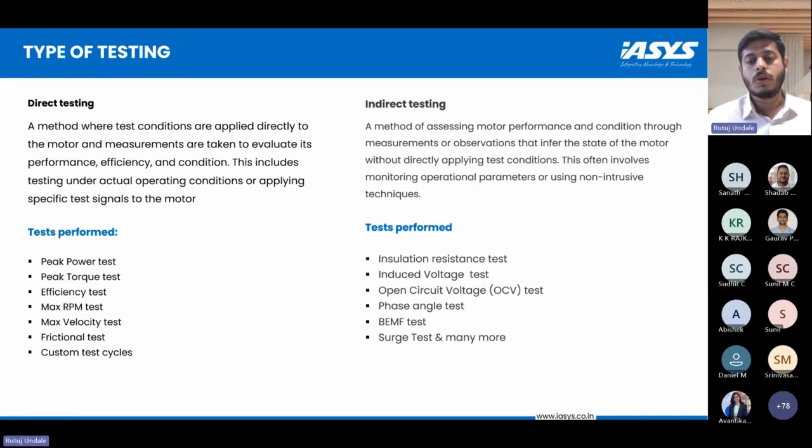Next one is the back EMF test, where the no load EMF or induced EMF is generated in no load conditions, to check whether the assembly of the motor is properly done or not. This is the basic architecture of the motor testing setup. So, depending upon the structure, this is the indirect or direct. There are many devices which are used because the devices play a vital role in this testing.

So these devices are connected in different ways, where they are connected in all three phases. A separate connector is connected to the motor. So depending upon the device structure, these are connected to the motor. This motor is connected to a servo or a dynamometer depending upon how much RPM and how much torque you want to give.

To run the entire system, we have an automation panel which includes a number of PLCs, servo drives, switch gears, and as it is a production line, the main factor here is the time and the safety of the operator. So the complete cycle time we have to manage with all the safeties. Considering the safeties, we can use light curtains, so that no physical object can enter the testing area during testing, and we can stop the test immediately.

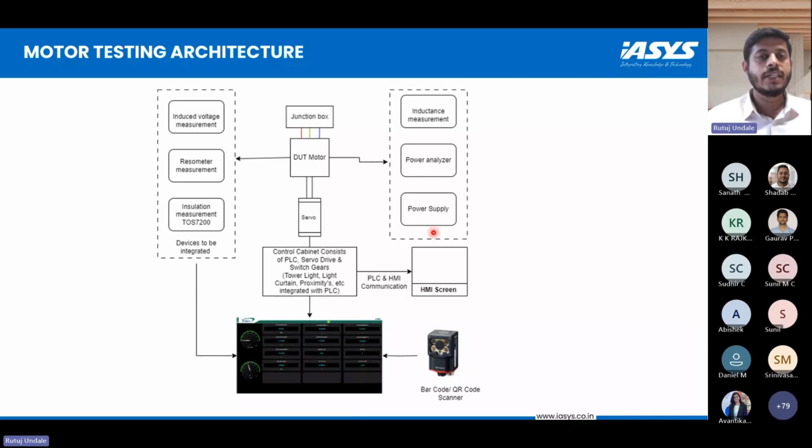This is directly connected to our server, where all the data results of the motor are saved under that serial number. So this is the complete architecture, where you can run a number of tests and check whether the motor is okay or not.

So next was the benefits of indirect testing. As I mentioned, once you completely assemble the motor, you have to check the various parameters, and once you get a failure there, a lot of time is invested in that. So to reduce the time and increase the productivity, we can use these indirect types of testing in the earlier stage of assembly of the motor.

So in this, the major parameter is the resistance of the motor, to check whether the motor can resist high voltage shocks and short circuits: insulation resistance. This testing is necessary, as almost 80% of electrical maintenance and testing involves the integrity of electrical systems.

So the voltage induced in this testing directly influences the torque generation and mechanical power output. So this is a very major parameter, because rather than doing the performance test at a later stage, it's better to do the same testing at the earlier stage. That is the voltage test, where we can clearly know the motor can generate that particular amount of torque or mechanical power.

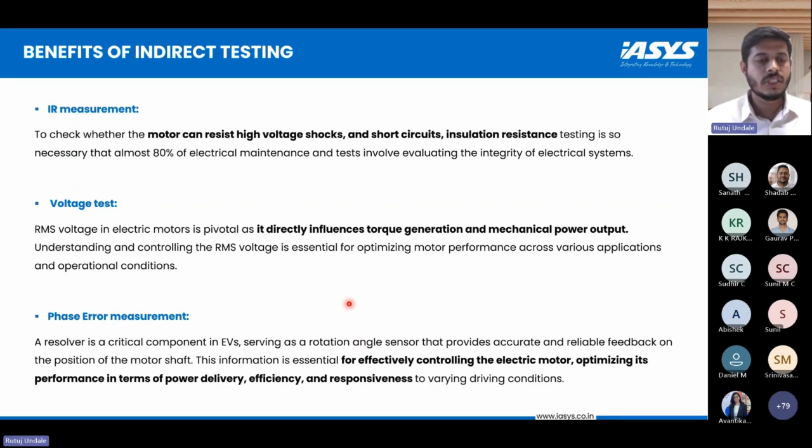So these are all the devices. Some of the devices I can say which are used, such as power analyzer, where you can have a number of parameters such as phase voltage, phase currents, power supply, and frequency as well. So in performance testing, you need to power up the controller. So to power up the controller, we need the DC power supply constantly giving the power to the controller.

And to check all the electrical parameters, we need the sensors which are integrated with the power analyzer, that are current sensors. So to check the other parameters such as the resistance, we have an insulation measurement. In this type of test, the motor is induced, or a high amount of voltage is passed through this device within a fraction of seconds. And once that voltage is passed, we get a resistance value, and from that same device, we can get to know whether the motor is okay or not. So from the similar device, we can check the motor is okay or not instead of going to the automation system.

To check the angle or to check the phase measurement, we have a resolver measurement where you can check the angle between the stator and rotor, as well as the RPM of the motor, because nowadays the motors are assembled with inbuilt reduction ratios. So the shaft RPM is completely different to the rotor RPM. So if you want to know the original rotor RPM, that can also be recorded in this particular device.

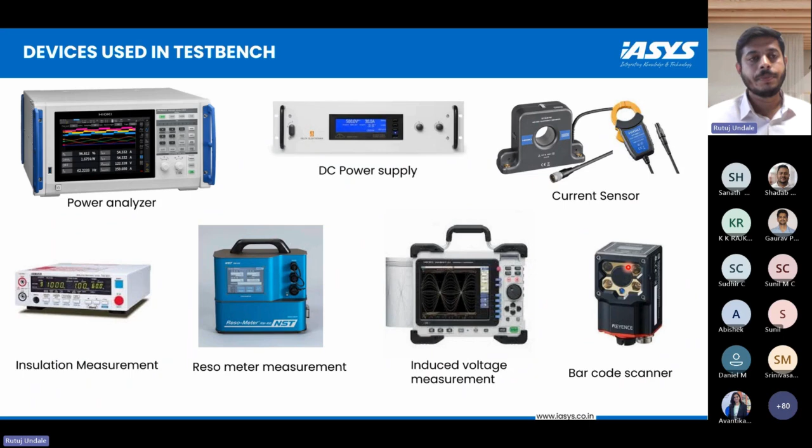So once all these tests are passed, you get a final result of pass. If any one of the tests is failed, the final judgment will be failed. So this can be customized as per the customer's requirement or any standard format if any customer has.

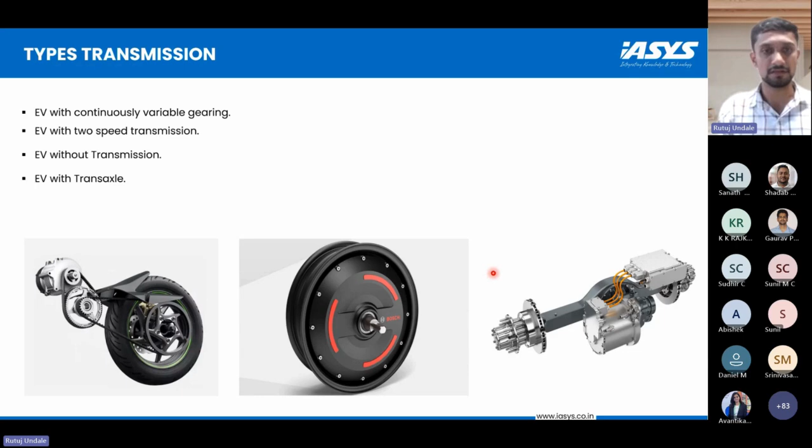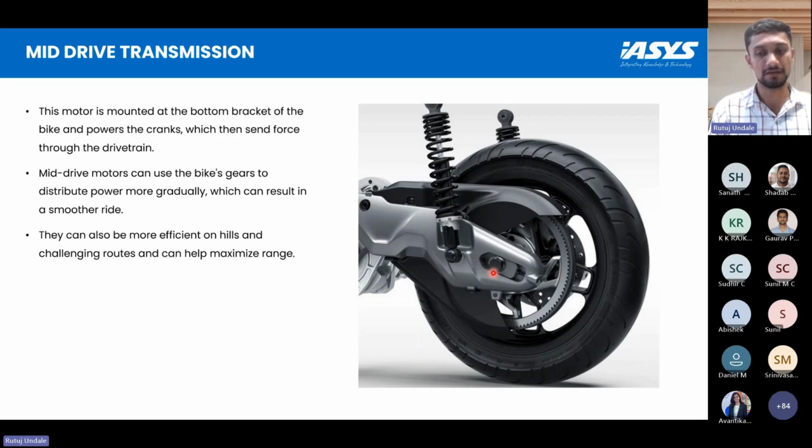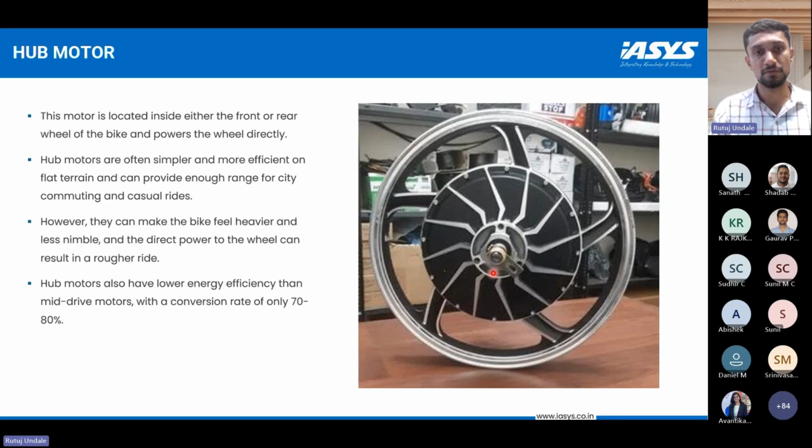So first we'll understand the difference between the mid-drive, hub and transaxle case. In mid-drive, the motor is mounted onto the frame of the vehicle, where the power is delivered to the wheel via gears using belt transmission. In a hub motor, the motor is directly placed on the wheel, where the power is directly transmitted to the wheel. Hub motors are more efficient on flat terrains and for daily commuting. Hub motors also have low energy efficiency compared to mid drives, with an energy conversion ratio of 70 to 80%. Transaxles are mainly used in commercial vehicles.

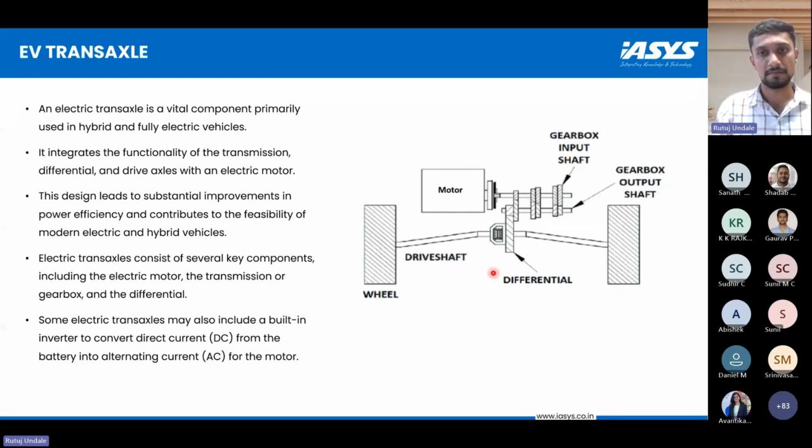They consist of various different components in the transmission. The first one is the motor, second is the differential, then we have the gearbox. Transaxles are mainly used to deliver the power to the wheels in a more feasible way. These are some of the major key differences between all three transmission drives.

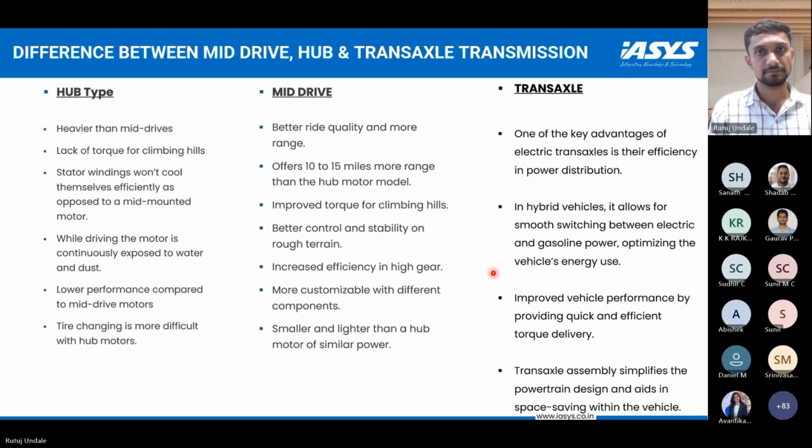So now first we will understand the simulation model, where the main aim of this model is to predict the energy efficiency and the power consumption of a drivetrain. First we have the driving cycle imported to our model, which is the NEDC cycle. The main purpose of this NEDC cycle is to verify the power consumption of the EV or any commercial vehicle. Then we also imported the motor efficiency map of a particular motor type using the manufacturer data. Also, we have used MATLAB and the QSS tool to provide the data and predict the outcomes of the model.

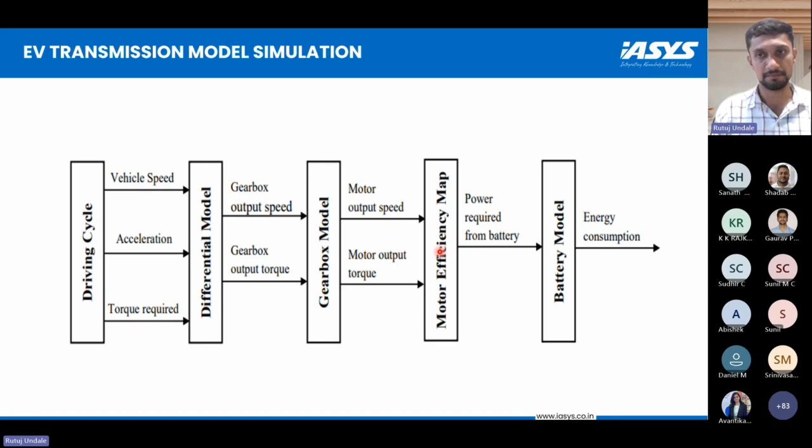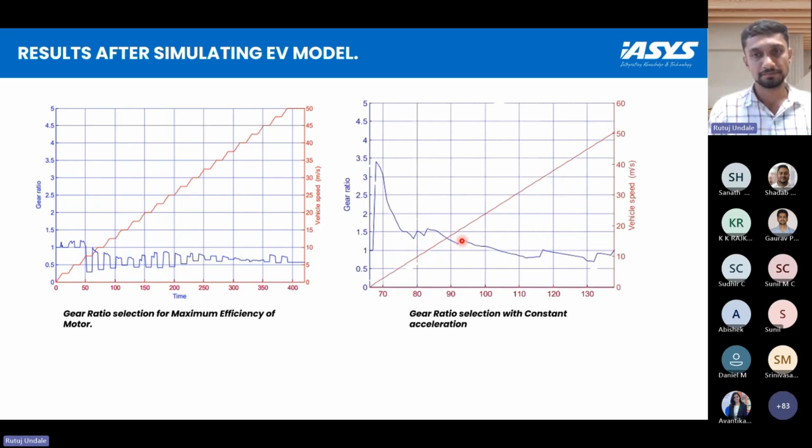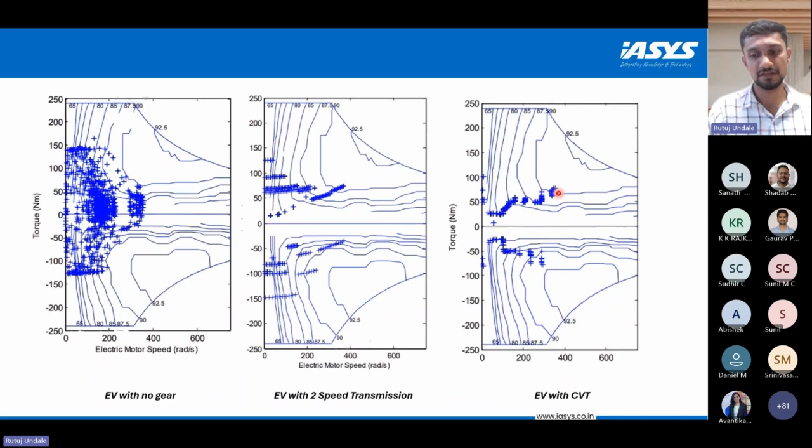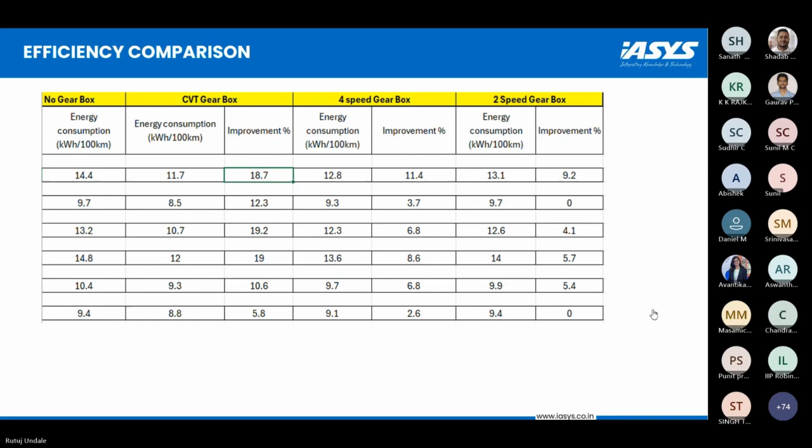Now we will see the system architecture for the transmission test rig, and how IASYS will handle the transmission test rig. Here is our main software, Orbit, and there is an embedded controller which we have communicated with, and there are DAQ modules through which we can take the signals for torque, temperature and pressure.

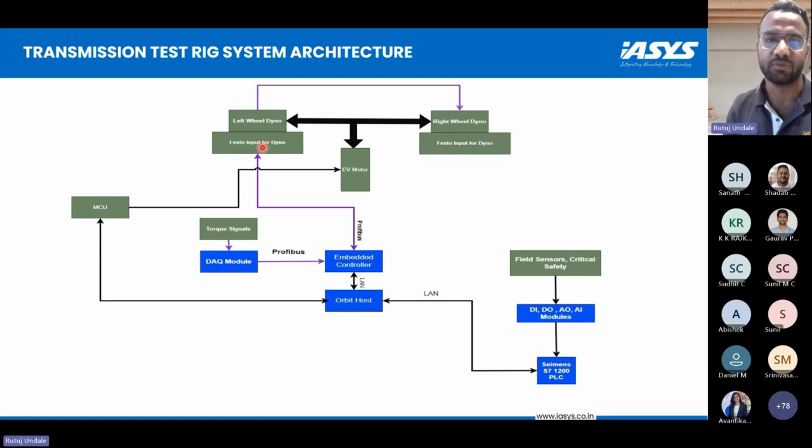And from CAN, we can communicate with the EV motor via MCU, and we can give a demand to the EV motor also. In the meantime, we will send the demand to dynos for the transaxle case. There is a left wheel and right wheel, both dynos are there. So we can send a torque demand or speed demand to the left wheel and right wheel dynos also. And also, we can communicate with safety PLCs because there are so many safeties which we need to consider while doing the testing.

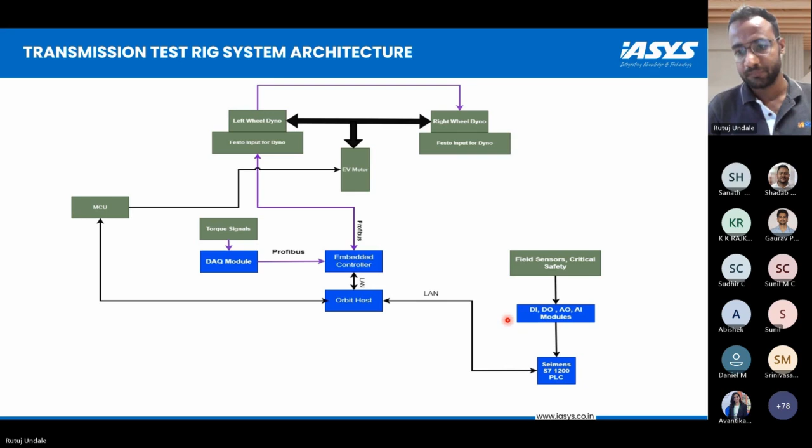These are the following tests which we conducted on the test bench, like acceleration test, efficiency, motor thermal, RLS test, and NVH. In the acceleration test, we will check the vehicle RPM from zero to its max full capacity with 100% throttle in 1 second, and how the vehicle will act on the RLS test, we will check that.

For the motor thermal test, we'll check the thermal efficiency and how the motor temperature will work. And for the RLS, there is a road load test in which we'll evaluate the vehicle parameters on actual road conditions, and on that we will check the current and battery voltages.

And the next test is NVH. NVH basically refers to noise and vibration, and this we will check on a motor test bench in no load and loaded conditions also, which evaluates the gears present in the EV.

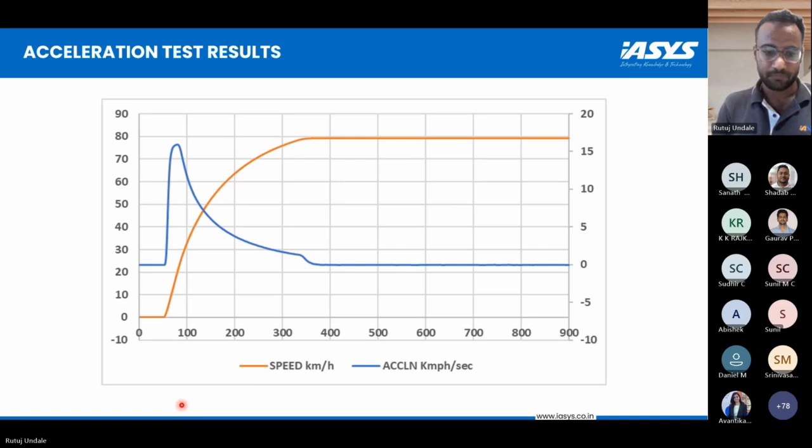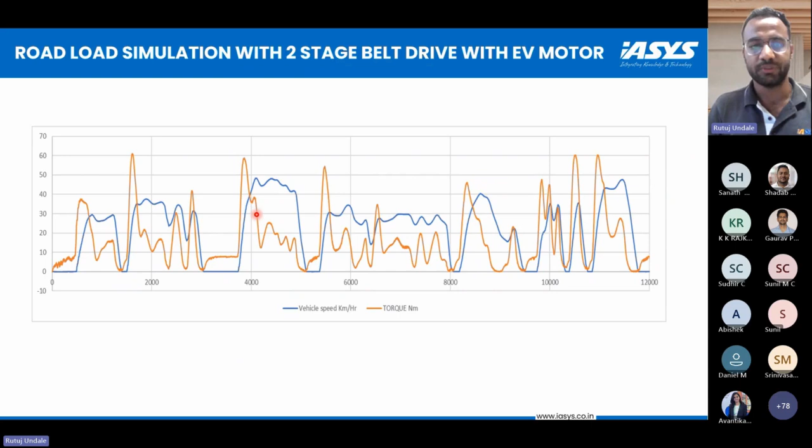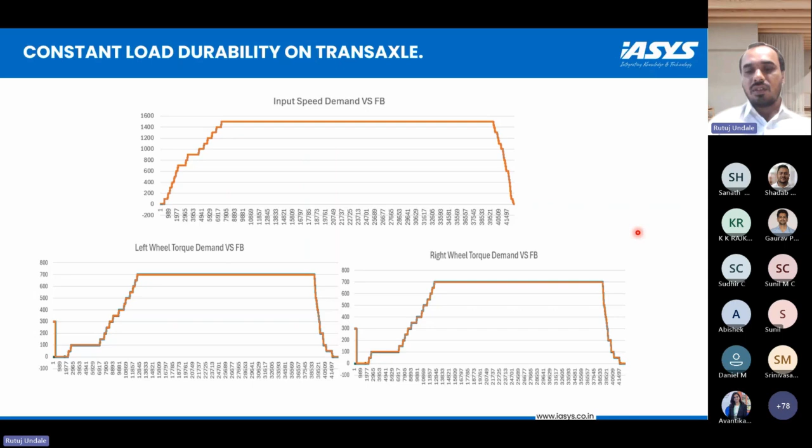Thank you, Tejas. So as of now, as you might have understood, we have initially gone through the component level testing, which is motor level testing. Then we have gone to the transmission level testing, powertrain level testing, and what is the iASYS offering in terms of both component level and powertrain level testing.

And now, in the third and last session, we will go through the system level testing, which is the vehicle level end of line testing, what iASYS has to offer you as an end of line testing solution, and what are the advantages if you go with the iASYS testing solution.

So basically, as we discussed initially, the end of line testing is generally done with some basic purposes. A few of them are quality assurance, to make sure your end product, which is the vehicle, has the basic quality checks before going onto the field. It might be from the aesthetic point of view, the technical performance point of view, or the safety point of view as well. This will help you to improve your quality and ensure that the end product is performing as per your expectation.

Then another few aspects are the performance validation, as I discussed just now, the safety compliance, the functional testing, that the vehicle is working as per the design specifications. Then to ensure the product which you are offering to the end user, which in this case is the customer using the vehicle on a day-to-day basis, is a good end product

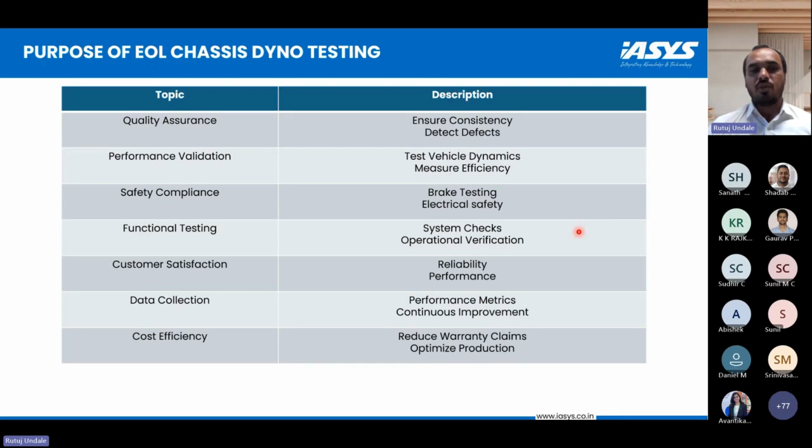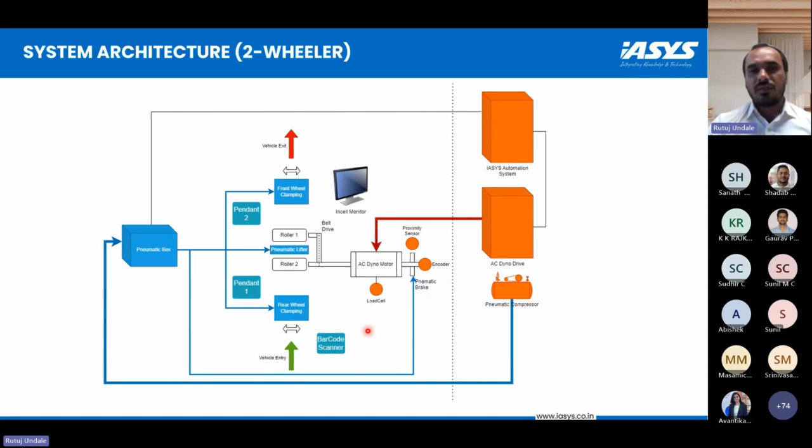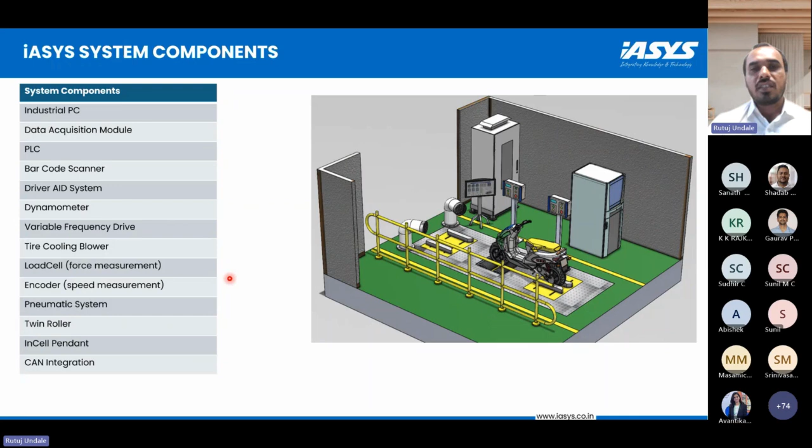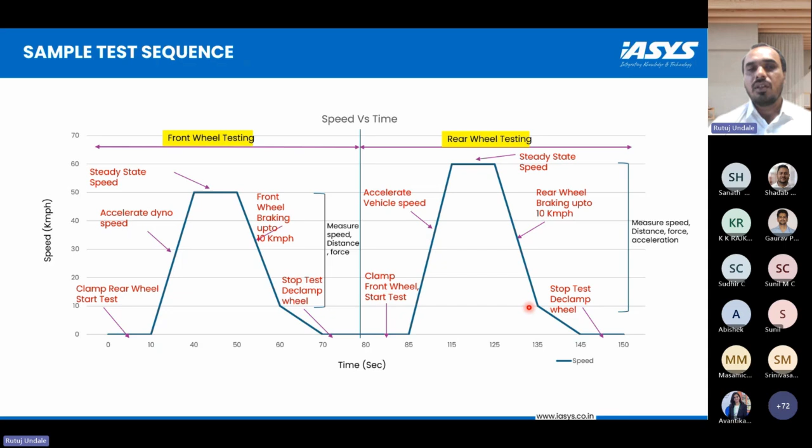The speedometer test ensures the vehicle and the roller speed are matching. The gear test or transmission check verifies the vehicle is reaching the reference speed for each gear. The RLS testing ensures that the conditions when the vehicle is driven on the road can be simulated on the chassis dyno. As I explained, our controller will make sure this RLS test is performed with proper accuracy and control.

The cruise control check or the hill check is with a particular gradient. We will provide some additional force to the vehicle, and the reference resistance force will be compared with the actual force. The drive cycle simulation is repeated by the RLS.

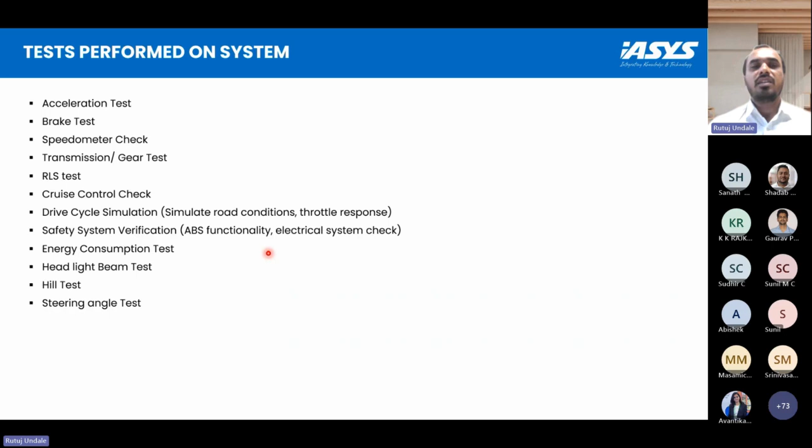The energy consumption test verifies the energy consumed by the vehicle during that cycle. The beam test and steering angle test can be performed on different stations or the same station, and the data will be collected on the same automation system. So these are a few of the tests. Apart from this, if customers or users have any custom requirements, those can also be met using IASYS provided systems.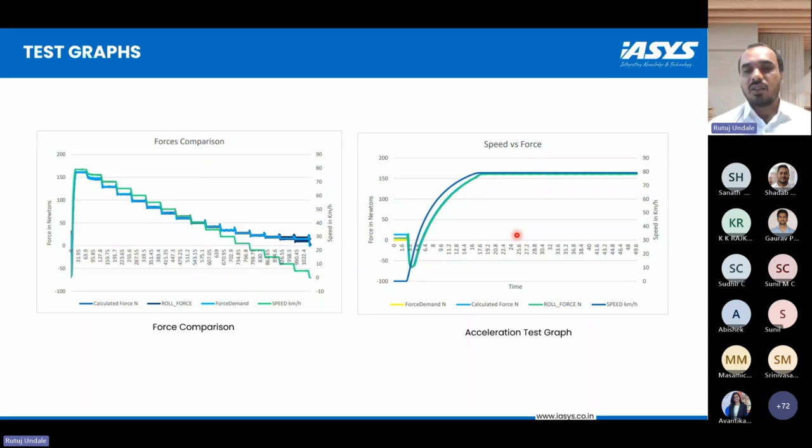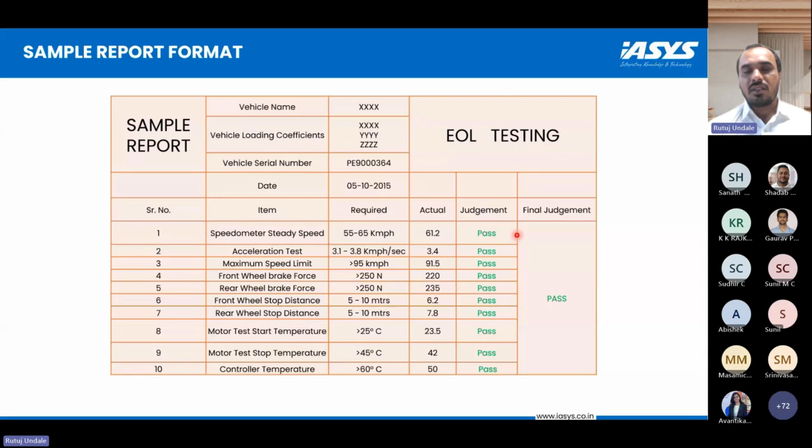Again, as we discussed earlier, we can provide a different kind of report format. It can be a standard format provided by IASYS, or it can be custom formats as per the customer requirements. Or we can go to the next level if the customer is having some MES integration or some server data integration requirements. We can do that part as well, because IASYS has done server integration with our own data management system or with third-party server systems at many places in the past few years.

So what are the advantages if you go with the IASYS system? As we told earlier, the complete test processes are automated, right from the UUT transportation till the report generation and till the data analysis. Each and everything can be done automatically. Ease of use, right from the operator level users till the management level users. Everyone can use these systems very efficiently and very easily.

And one more thing is you can configure the test sequences parallelly to the test execution, which will increase the efficiency of the test bed utilization. The downtime will be very less. The adaptability of these systems is very high. Adaptability is the ability of these systems to adapt to the customer's new requirements in terms of the integration, in terms of new test sequence modification. So these can be done very easily with these systems.

As the systems are automated, the use of resources is very optimized. The safety protocols: it might be system level safety, application level safety, or data safety. You can configure user level authentications. There are some hardwired safety interlocks as well. So based on the user, we can provide application access to each and every user, which will ensure that the data generated through these systems is kept secure.